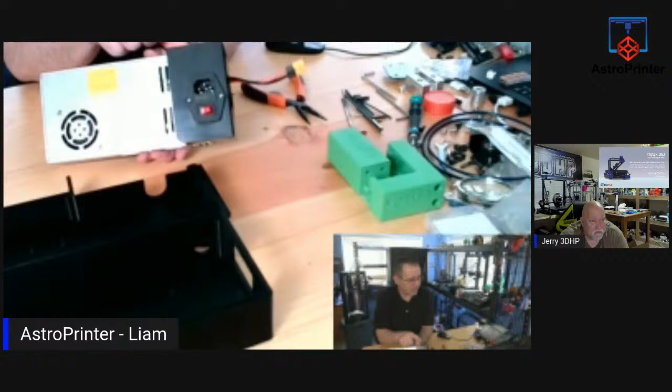Hi from Texas. So let's get the power supply done first. We have to take this power supply that came with it - let's switch over to the close-up view. We have to take this off because this unit has to get mounted in here, since this is going underneath the printer. So let's start out by taking this apart.

And we have some electrical connections now. Just make sure before you start this, take a photograph of the electrical connections, because if you get them plugged in the wrong spot, that's not going to be a good day. So slide this out gently, remove the connection to the power supply, to the printer, and we also need to use a screwdriver to remove these.

Thank you, Free Heathen. Yeah, it was a lot of fun.

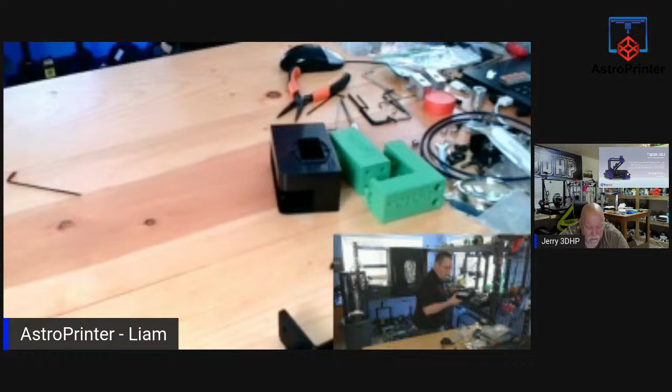So that's done, we'll get back to that in a moment. Now I want to bring up the base because I want to attach the drawer mounting unit, which is easy enough. It's only a couple of bolts, but let's...

Hutch's Makerspace said he might start streaming soon. Oh cool, so I'm gonna...

This is no longer needed, this piece here is no longer needed. But don't throw it away, everybody, keep it because you never know when you're going to build something, you'll need one. So always keep your parts, within reason, yes. Otherwise you end up with a junkyard at home.

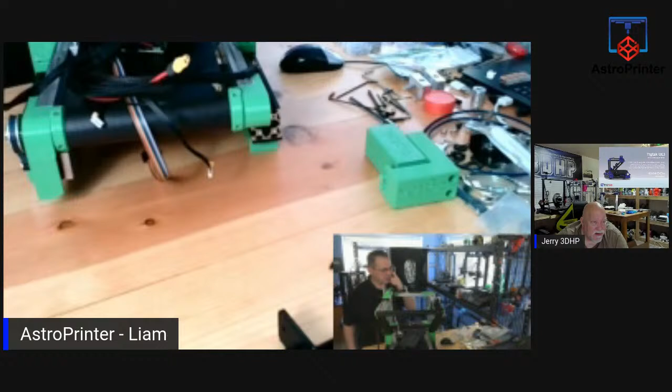So this is our printer as it stands today. You can see it better in the large view. What we're going to do is the tray unit actually mounts in here underneath the printer, and it also provides partial cover for this gear system, which is what drives our belt.

And then the other part comes on over here just to finish off this end.

Hello, Vincent 1977, how are you? Vincent, how are you? Good morning. Or good afternoon, sorry. So what we're going to do, I'm going to need some...

I think they're empty, let me verify the bolts. Good morning, Ben Brady. The parts that we needed modded, Ben, have been done by the company. They're 100% accurate now, thank you. They're about 99%, there's need a little tweak. Yeah, they work, I will feed that back to them today. But they're very, very close, so they will work. With a small mod on our side, it will work.

So the first thing I'm going to do is I'm going to mount this side. And the part that covers that will also hold the drawer, so I will need the drawer unit. Where did I put the drawer? Over here.

So this is the drawer mount, and it fits into the grooves underneath. So I'm going to tilt the printer up a little bit. So what will happen is this partly covers this idler here. It gets bolted in, and then this will slot in to these grooves, and it gets mounted in here like so.

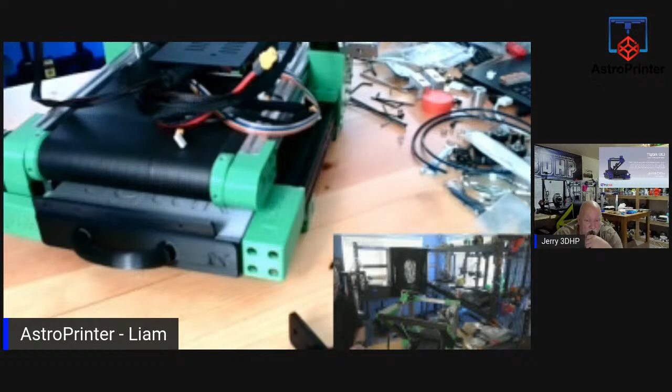TPU, print at 30 or 40 millimeters a second. Don't print fast with TPU. Print slow, and if you've got a PEI bed or any textured bed, do not print it on a textured surface because it will bond to it and you'll have a hell of a time getting it off. On a smooth surface, PEI works fine.

PEI will work okay, but you may find that to get the part off, you may have to spray it with water around the edges or IPA to get the part to slip. But water, some people say IPA, some say water. I find water is often better, but everyone has their own preference.

And the blade part that's going to be added on here, they're going to be posting the STL files tonight apparently, because I asked them about it the other day and got a response last night saying we'll do it tomorrow, and that's tonight our time. So for now I'm going to leave the drawer out of there because we do not need it in there.

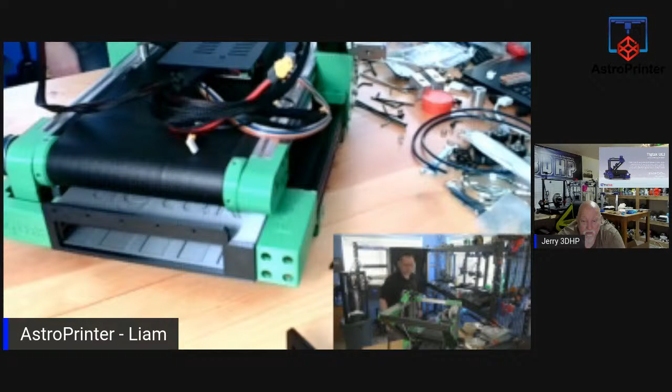And here I just dumped a whole pile of parts on the floor. Perfect, so we have that done, and the drawer is in there. The power supply is mounted in its box, which we can install if you wish underneath.

Ben's interested in a printer coming out of Italy, he says. There is a belt company. There is a company in Italy that does a belt printer.

Now, to mount the power supply box, there's T-nuts you have to use, and that's going to be awkward because the T-nut has to go between these. It would have been better if they'd used longer bolts and just bolted it straight on top of them there, but they haven't. They used a T-nut, so I have to take these out, put in the T-nuts, mount the power supply box, then wire up and put these back in again, which I won't be able to do because the power supply box will get in the way. So there is a design flaw there that we need to correct. I'll explain the design flaw in a moment. Let me come to the side here and I can show you.

I'm going to be off camera, off to the side.

So they have 2 holes in this for mounting, right? 2 holes here, turn it around so it's easier to see. These 2 holes, the problem is this is so wide, it's going to cover these, and you have to have a T-nut in between them. So I'll have to take these off, put in T-nuts, put them back on, and then do the alignment, because the power supply goes in like so.

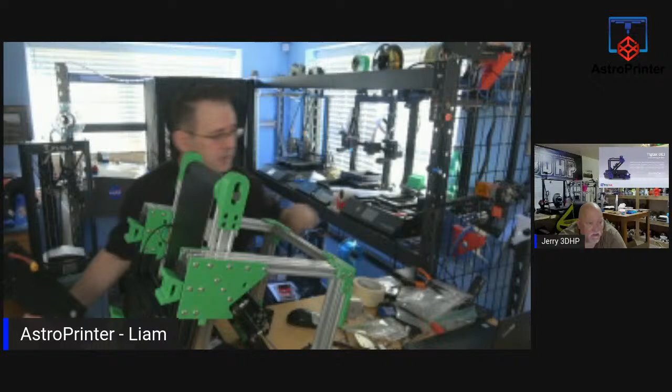Can you flip cameras while you're working up in there? Flip cameras to what view? You want the big view or the small view? The big view? I want the little one to go big, that way we can see what you're doing in there. You mean like that? Yeah, that's perfect, that way people can see what you're doing.

So this is going to mount on here, but because I need T-nuts for these 2 bolts right here, because this mounts in like so, and actually those holes don't even line up. This is too long, I'll have to move the holes in.

They moved stuff, but it didn't shorten this. So what I'm going to do, I won't be able to mount that now because of that, but what I will do is mark it.

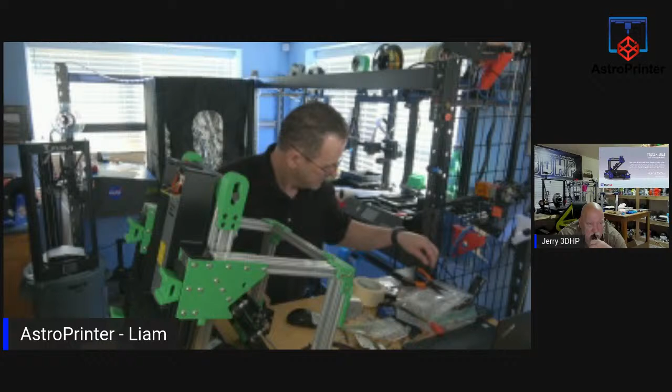Liam's trying to work that out. He thinks it's his printer. He's not sure why his video quality is not sharp. It should be. No, it's controlled by OBS on my computer, so it can't be controlled. No, Chris Travis, I'm not logged in as Liam's credentials, so I can't control his screen. Even then, you couldn't do it because it's all covered via virtual camera, and that's all on my local machine. No, what he meant was, I see what he's saying. Okay, I thought he meant just to mess with chat and pictures and stuff like that.

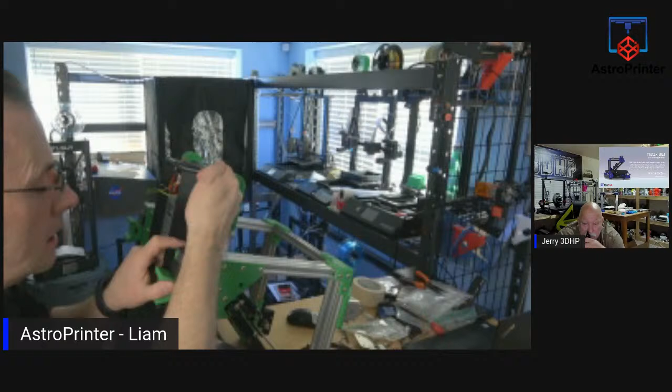So in the center, I'm going to mark with these where this should be, and I'm going to have to drill these out of mine, and then I'll feed back to them about this new position.

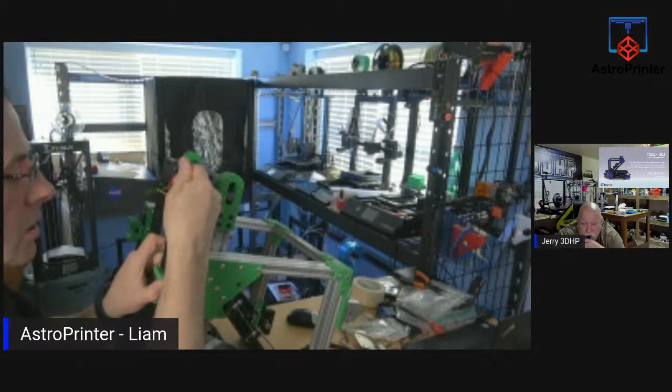Subsector says, on TPU, should I turn over the focus glass plate over? Yes, and not print on the textured side. Correct, and do so when you use some PVA glue on the surface.

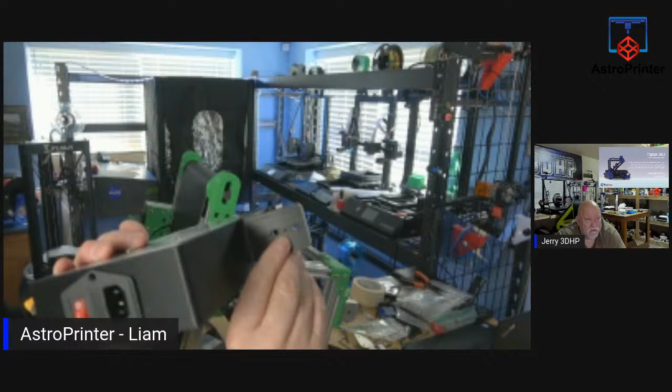So I've marked 2 spots here. They're offset by about 10 mil, so they'll have to move the design. Let me just measure how far it is. From center, it's about 9.5 millimeters, so they'll have to move them in 9.5 millimeters.

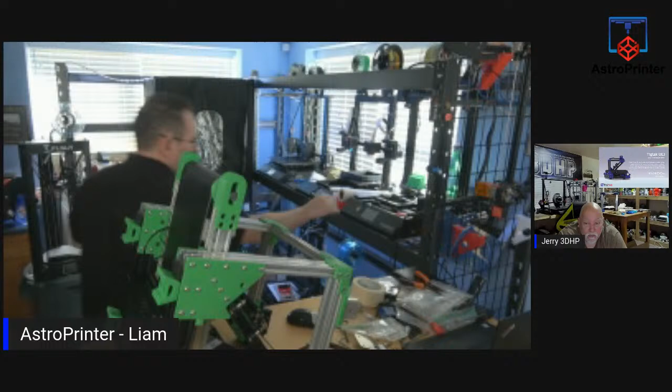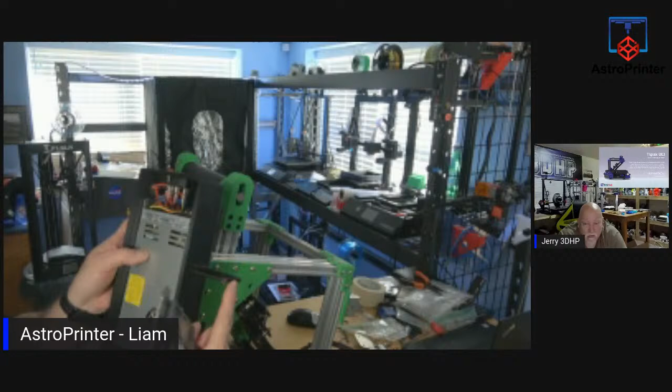And I'll give them that feedback. So they have to shorten this, because when that's mounted, it's sticking over the edge by probably 9.5 millimeters, and it shouldn't be. So let me see, it's sticking over by about 5.5, 6 millimeters. Yeah, so it's overhanging 6 millimeters. So this is 6 millimeters too long, and these bolts need to be moved.

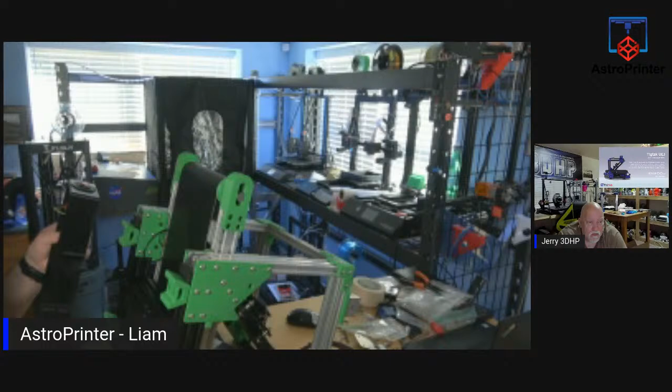These holes need to be moved about 10 millimeters, should be good, in 9.5, 10 millimeters. So I will feed them that back today, but I can drill this myself later on. So I can't do that right now.

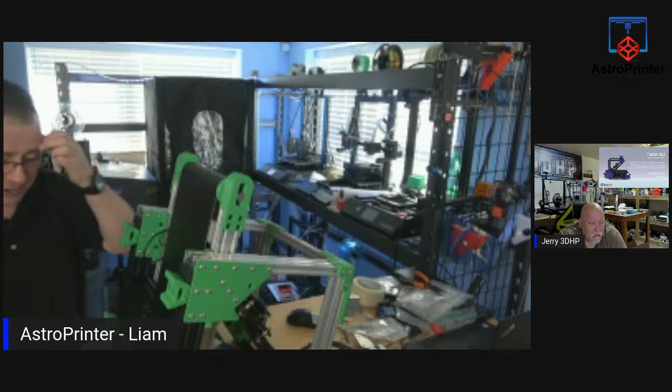But that's why we beta test, guys, right? So we can't do the power supply or anything else because I'm sure the other case is for the main board that I'll mount on here, and for all the cables for the main board. I'm pretty sure.

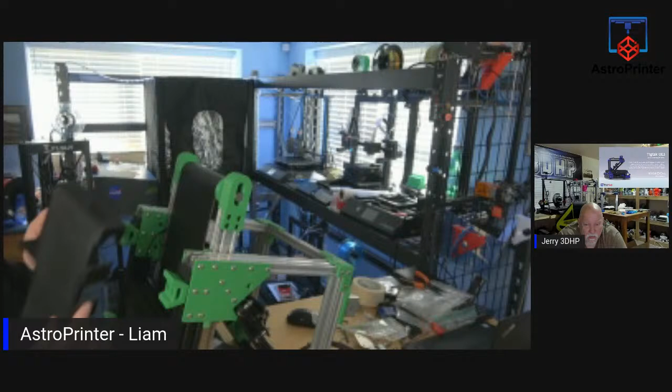Actually, that's the opposite. No, that's upwards. Actually, that is the right size. That one is actually correct. So this one here is correct because of the way it fits. Let me spin around here.

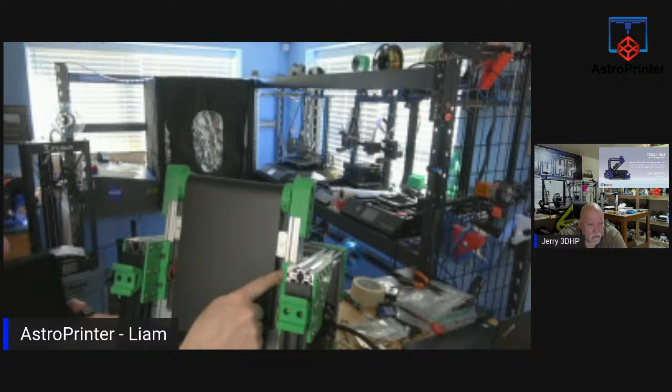This fits on here perfectly. I need to remove - oh, but another thing I found: these cap heads that are here are too tall; they get in the way, so they have to be replaced with countersunk M5 countersunks, I think M5x16s. I'll double check the measurement later. I'm gonna have to go buy them, but the place I buy them won't be open till tomorrow. These have to be replaced, both here and here, to hold on the belt with countersunk screws or mushroom head screws so they don't interfere with the case.

But if you line stuff up, this one is actually properly aligned.

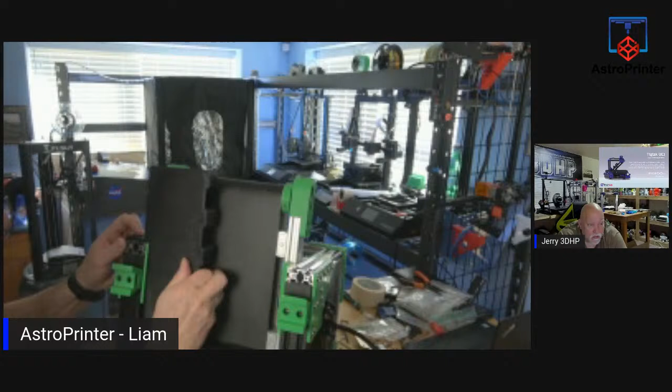The subsector - when I first started printing with TPU, I got on Facebook in a few groups. In the search bar I typed in printing with TPU, and I watched a few videos on YouTube, and got multiple opinions on different things, and then I kind of figured it out from there. It's how I usually do just about everything I do. Yeah, when you're unsure, reach out to the community - there's a lot of videos on it, a lot of people who've done videos on it over time.

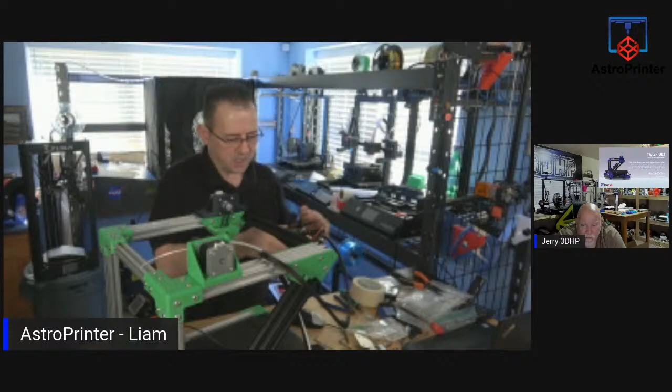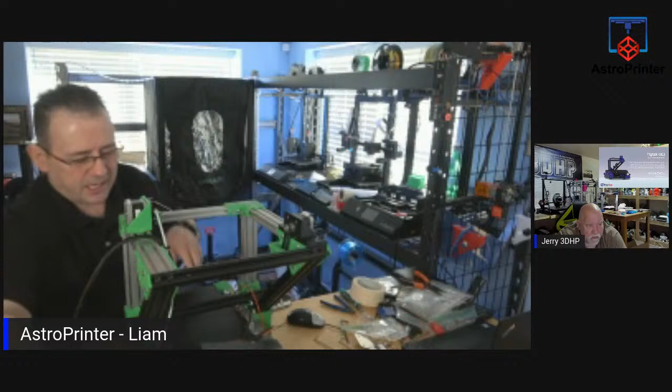Since we can't mount these because I need to be able to mount a power supply first to route cables, I am going to go off and start working on my x and y-axis instead. I'll get these wires out of the way because I have yet to.

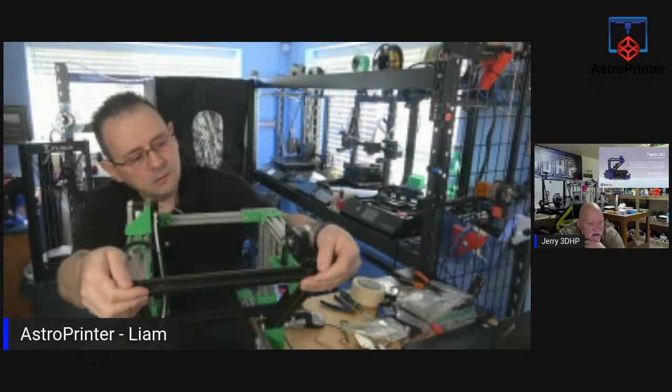On the front top rail where you have the black and chrome bracket aluminum extrusion, on the very front, how flush is that? Flush - when that comes out and meets it, does the black stick up slightly higher? No, they're flush. Okay. If they're not flush, you're not at 45 degrees.

Now, on a belt printer, or in this configuration, you come with a plate that is going to be the new mount, because the original mount that comes on the printer will not work. So you're going to mount this on here, and instead of mounting normal, you're going to mount it differently.

Let me see if that's a bad angle. Let me go to the close-up camera, Jerry - it'll be better, I think. Let me tilt that up, it'll be easier. There we go. So you're going to mount this upside down, okay, and underneath. Okay, cool.

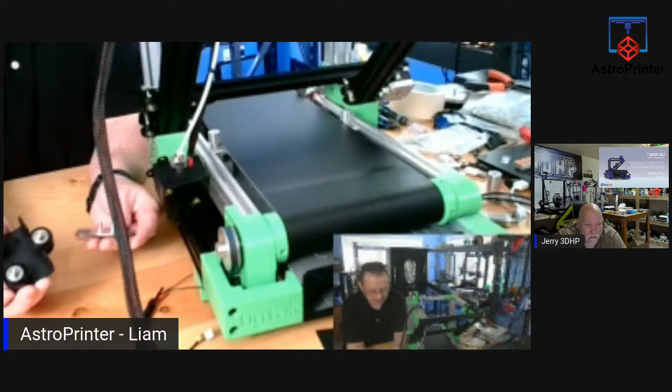That's how it gets mounted, because then your hot end sticks down under here and travels and prints on the bed. So we have to take apart the original one and take all of its wheels off and transfer them over to this. So the two upper ones go here, and the lower one, and the wheels go on the back here, in the back section of it.

So we'll need a wrench, and we'll need some Allen key sets. Should I have the right ones?

The last TPU I used for my tracks on the Droid build was Priline off of Amazon, a company called Priline. eSun TPU is really good too - I used eSun, and eSun always worked out well for me.

So these are Nylock nuts - Nylock nut, meaning it has a nylon inside of it, so once you screw it on, the bolt bites into it and locks it in place so it won't back out. So as I said, this is the plate. With this part facing down, we're going to be putting the nut in - this one, the bottom one, in this direction, with its offset wheel, and then we'll reattach the nut again on the outside.

Overture should print nice, hmm? Overture TPU should print nice. I haven't used Overture TPU, but as I said, I use eSun. I've also used NinjaTek. Yeah, Subsector ordered Overture - it's all she said she could get. That's fine.

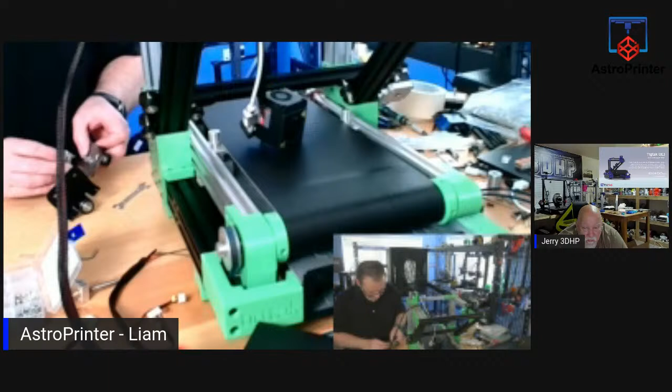Nadav said that they got two Ender 3 Pros for $219 each, and one's going to be a switch wire. Yeah, they recently announced that price, that deal. I saw that email go out from Micro Center yesterday. Well, one he said is going to be a switch wire. I don't know what a switch wire is.

A switch wire is a machine that uses belts rather than Z rods. Oh, okay.

So this one is important to make sure you do it correctly. Let me get it out of the way, because this is where you have your adjuster nut, your offset nut. Someone asked what the bed material is in those belt printers - it's nylon, but it looks like it's got a TigTak coating on it.

So when you're putting these lock nuts in, one side has a raised area, and if you look closely, you'll see it's not on center. That's how we adjust that wheel. So that must slide into the larger hole there, because otherwise it won't adjust.

The switch wire is a Voron printer using a sliding bed. It doesn't necessarily have to be a Voron printer though, there are other switch wires out there.

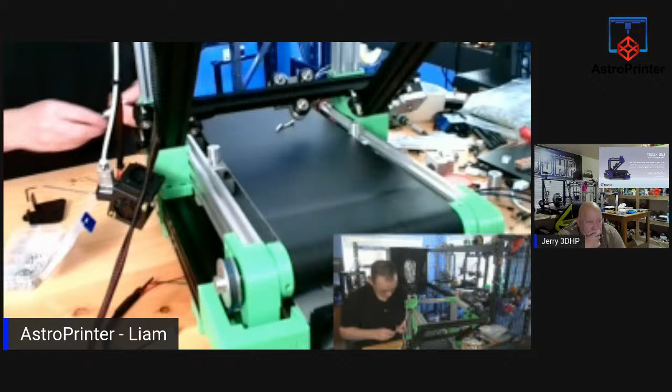That was well timed, I said spin around, and the hot end spun around on its own. The heat block did it, it's voodoo, I'm telling you it's voodoo. So the grub screw should be facing not towards the short side of it when it's printing. It should be facing downwards, right? That way, when it's mounted, you can actually gain access to it. So I'm going to do that over here.

I wonder if you ever got a tear in your belt. Obviously you don't want to replace it. What would be a temporary fix to be able to keep using it, tape off that spot and don't reprint there? I would avoid printing on that area, but if you got a bad tear you're better off replacing it, because you must remember the belt is held in place by even tension on both sides. If the tension is off on one side and the other, it's going to drift towards the side where there's no tear. That's going to ruin your alignment, so you'd have to replace it. You can avoid printing in the area to a point, but it's not the solution.

Oh, Chris Travis, take care Chris. He's probably already gone but I just seen his comment. Yeah, I said hi. All right, thanks Chris, I'm slow today guys, it's early morning. You must remember Jerry has volunteered to come on and help out cover the chat, but Jerry is 3 hours behind me, he's in Vegas. Well, it's almost 9 here now, but I got up at 6, went to bed like 12:30, I don't sleep well at night, so I set my alarm so I wouldn't miss it. Take care Matt, get some sleep. Yeah, getting sleep man, Matt's another guy that doesn't sleep. I think Matt is part vampire, part daywalker.

Now, I would do it without the fan cover. The reason why is, even though it looks nice, comparing it to the normal fan that comes on the hot end, this may interfere with airflow. If you compare how open this fan is in comparison, this might interfere with airflow. So we'd have to do some testing. I might leave it without the cover on it altogether because I'm worried about airflow through this.

I've had clogs that way. I've had my fans - I leave them open, cover or not, they pick up dust over time, and they're spinning but not quite as fast, and you get clogs because of it. Yes, you get heat creep because of it. Yeah, and that often happens, and you have to clean. That's why every time you go near your hot end, you have to clean everything out.

And the ones that come with the printer are often brushed, sleeve bearing, cheap hot fans. If you're ever going to replace them, go with dual bearing brushless fans. That way you have less of an issue with them, and they perform quieter as well.

I clean them with a Q-tip and alcohol. Yeah, and tweezers to pluck out any of the strings that actually get in there. Yeah, I do the same.

So we have that done. So let's get on and get our x-axis done. There's a belt tensioner here that I need to mount. This is the original belt tensioner that needs to be mounted over here.

I'm not going to tighten it in, I'm just going to snug it so it doesn't flop all over the place. Let's see, slide this up so we can get access. That straw - can you drill holes in the side so it clamps? It's too thin.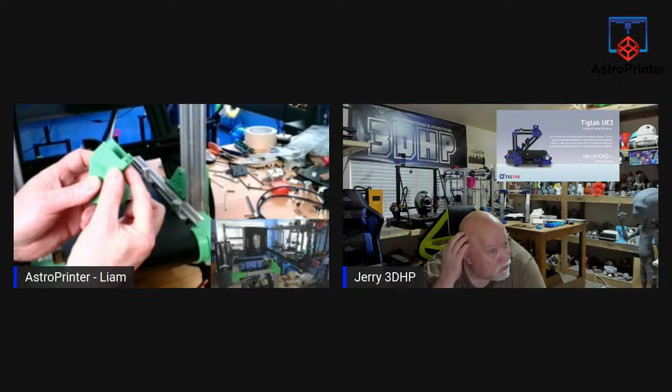You know what? A bit of double-sided tape on the inside would actually do the work, because it's on the cool top part of the heat break anyway. So if I put something like padding in there of some form, and you slide it on, it would kind of wedge itself into place and stop it from wobbling, and that would probably stop it from knocking itself free. Wedgies are always good, that should help.

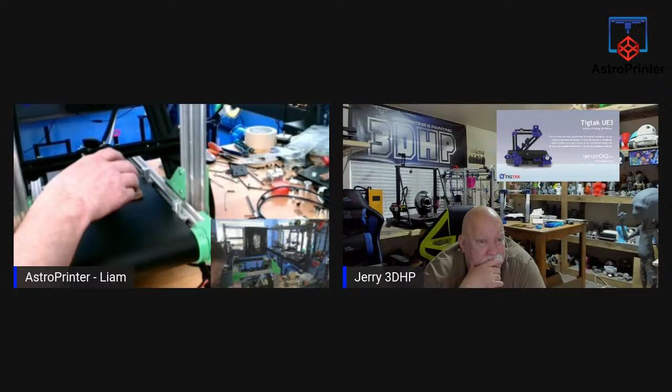Yes, Jerry. From experience, no, they're not great.

So the fan and - actually, I see another issue. If that mounts on here, Jerry, there's no part cooling fan.

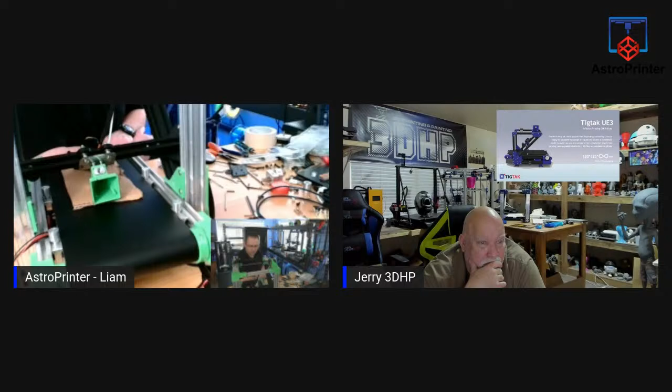Look at the design, there's no part cooling fan in it. Yeah, there isn't, which is a design flaw. So they have no part cooling fan on this, which means you always have to be very careful about what you're printing. If you're doing really small parts, the parts won't cool. I have to go back to them on that today, that they actually totally missed the part cooling fan because look at the design there.

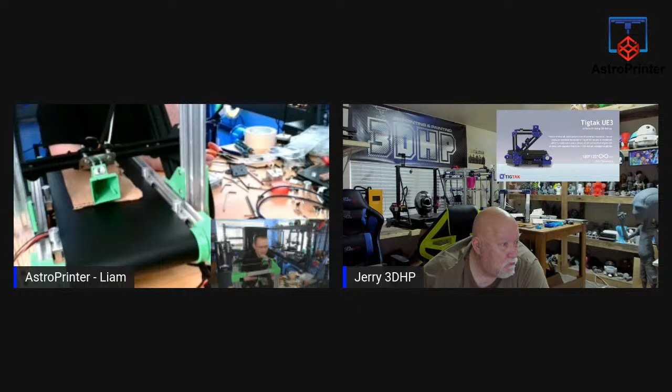I don't think there is, Jerry. Am I right? I'm looking at the side view, it doesn't even show that part. I'd have to run the video. Share it again so we can all see. Let me run the video, just mute the audio. Actually, let me bring that full screen.

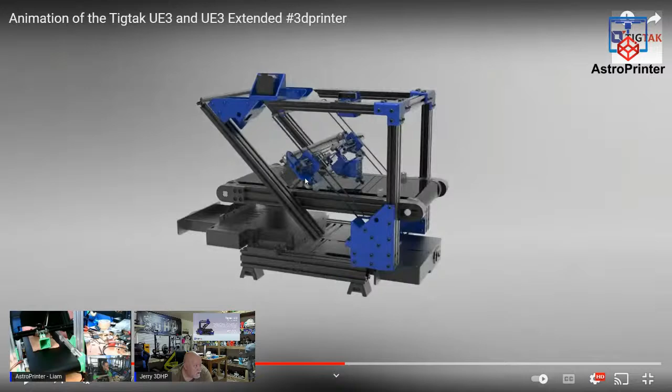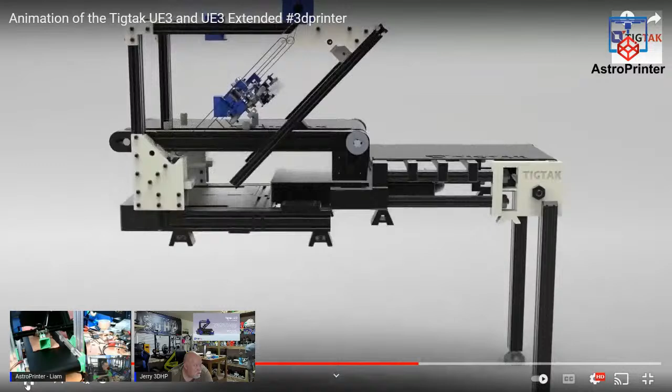Yeah, there's no part cooling fan. If you look at the hot end, it's totally missing a part cooling fan. Yep, there's none, right here. I didn't even think about that until you mentioned it. I just looked at it now and was wondering where's the part cooling, and I remembered I never printed a part for that. Even in that picture right there, it just shows nothing. So, okay, take that out. Yeah, there is none. So we found a design flaw. We've done a couple of design flaws, and this one is for one, there is no part cooling fan.

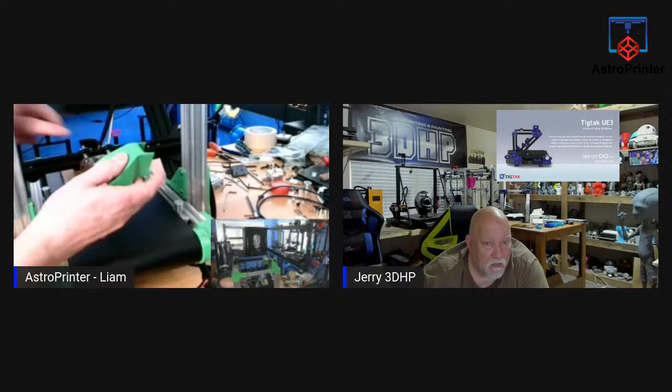Now the other thing that worries me a little bit is, even though this is PETG, this part down here rests right up against here, right above the hot end. It's so close to the hot end, I'm worried that latent heat rising would actually cause issues. And I printed that part out of PLA, I didn't mind, but this is PETG, still...

If you try and print PETG on this, you're going to run into problems. It might limit you to only PLA and not TPU, but PVB and materials like that. So I have to go back to him about that because they have no part cooling on this.

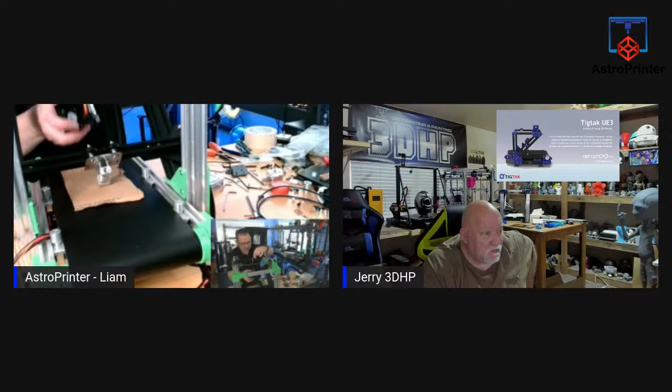We can get it wired up anyway, right? We can get the rest of it, we can get the belt on. I'll be right back. Okay Jerry, so I'm going to reuse the original printer belt that came with the printer. I have the original belt here. I should be over on this side, let me just put that over there. I'm going to use the original belt that came with the printer.

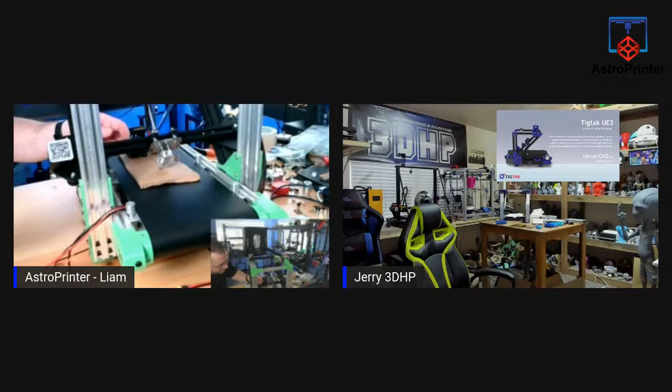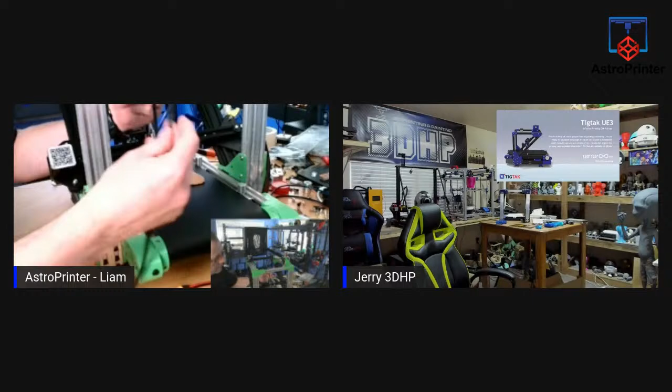And it mounts, I'm going to be off to the side here, so please excuse me. The belt will mount as normal, whereas you put the belt in and turn it so the brass grommets are pointing outwards. Make sure the teeth on the belt, right, one side is smooth, one side is teeth. The teeth are actually pointing in towards the extrusion because you want the teeth to go around the idler, because the idler needs to grip it.

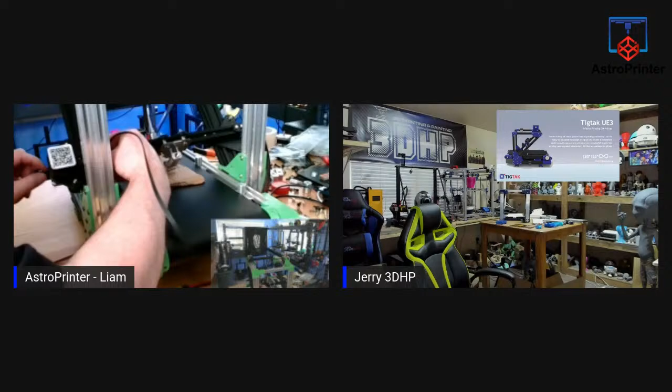It needs to go around the idler so it pulls, and then back out the other side and around our belt tensioner. Where's it going? So this is interesting that we're finding design mistakes, but that's why we're beta testing, right?

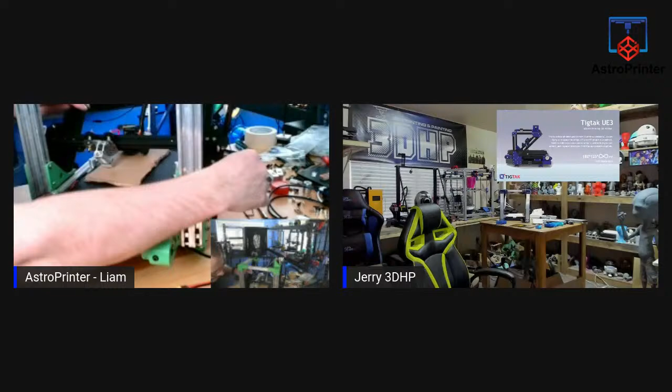That goes onto the idler. There we go. Goes around our belt tensioner, which is on this side here. The cable's in the way. There's our belt tensioner. And loops back underneath again, over to our hot end bracket, and again, teeth pointing downwards. We feed it in.

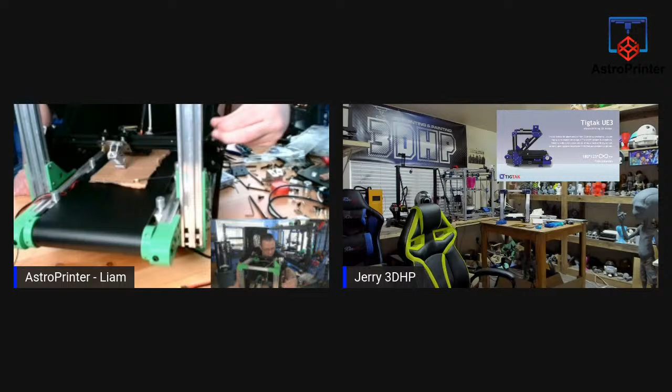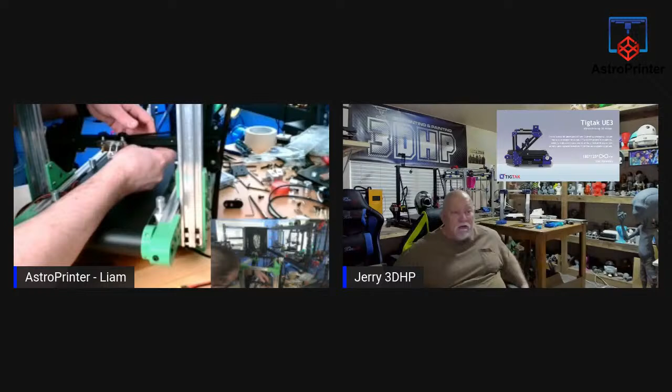Actually, I might take that off altogether because I need a small bit more leeway with that. I can put that on after the fact, need a small bit more clearance to get these attached. And it slides into the groove and turns. Now our belt is in place. Now we're going to put on our... where did I put that? Our tensioner. Loosen these up a bit.

We slide this into place and put our belt around it.

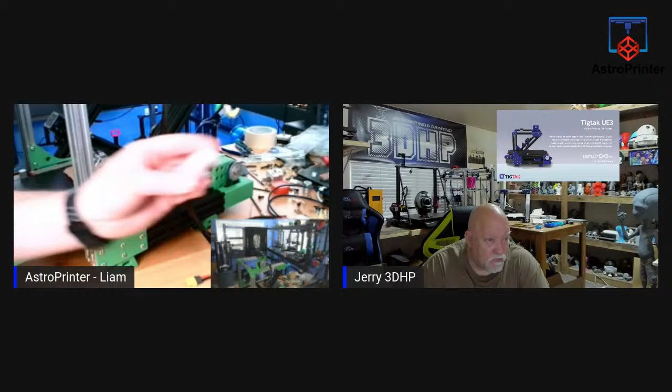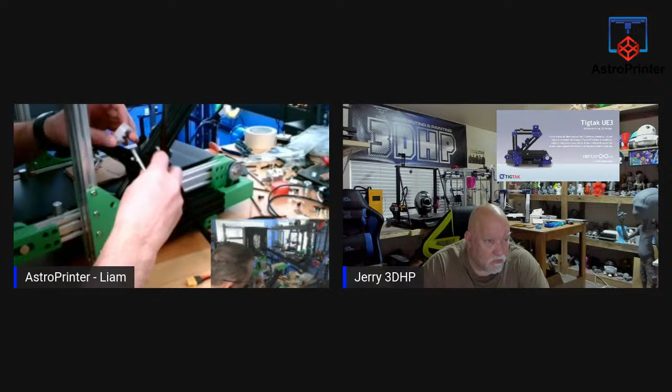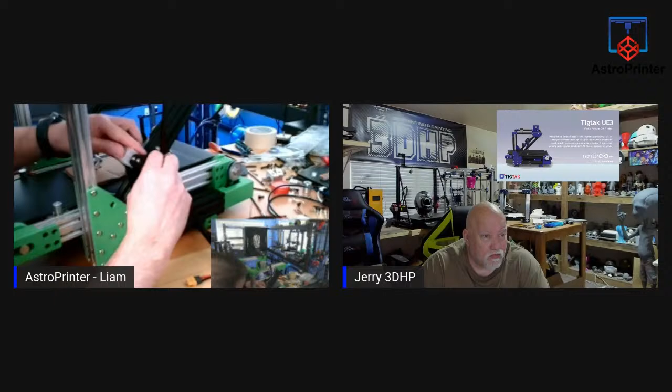If you've never done these belt tensions, you can get a little part you can 3D print. I use this all the time, and it keeps the belt tensioner straight. You slide it over your extrusion with the belt in the right place, so it goes through the inside the V groove, like this. Put it on there, get the belt somewhat tightened into place. Let's make sure that's in right. Okay, and then push. It allows you to keep this straight.

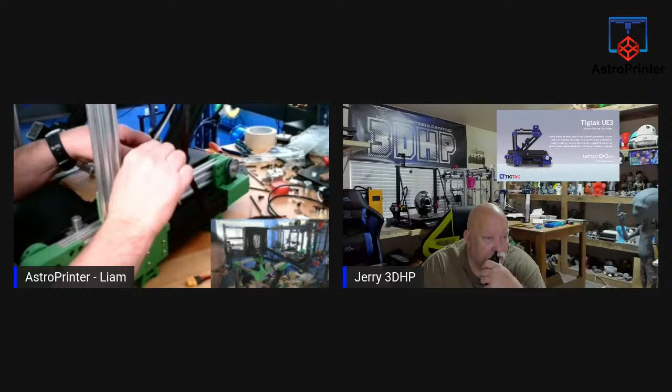You're pushing on it while you tighten this down. Simple little device. Just put your thumb into it, turn it, and you get good belt tension. It's an easy way of doing it. Let's turn properly so it doesn't slip out.

Now we have a nicely tensioned belt. It's easy because you just put your thumb on this. One area of it is angled, one area is straight, so the flat end goes up against the belt tensioner, and then the other one you put your thumb behind it. It fits your thumb perfectly. Just hold on to the extrusion and push with one thumb hard, and that'll get you the right tension.

You can tell when you bring the belt all over to one side, you should be able to move it - get your finger in there. You should just about get a finger inside of it, right? That should be roughly the right tension. You can always tighten up later on if you find it's an issue.

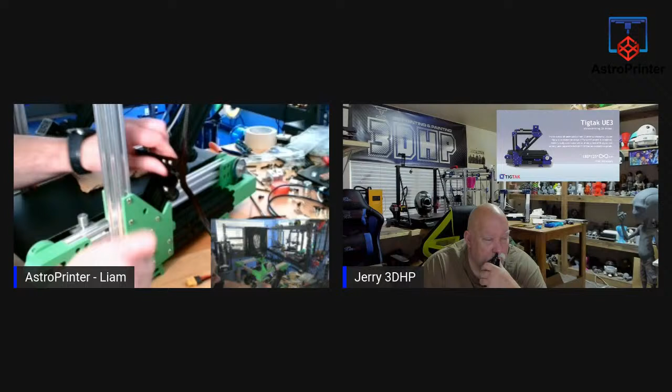There are also PETG 3D printable belt tensioners out there. I know Prusa printers you can get them, and by putting it on and pushing down, you can tell if your belt is the right tension or not.

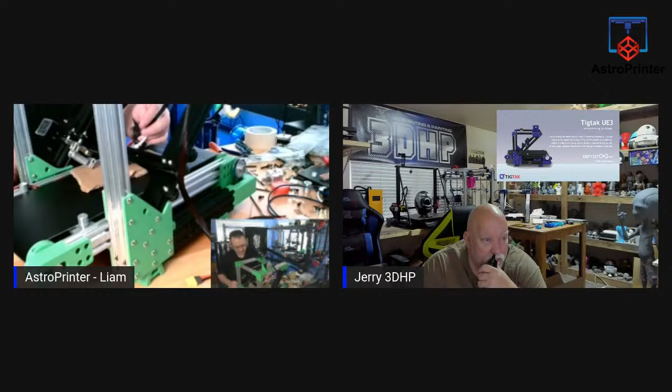So I'm not going to take this apart. The reason why is we don't have the parts for it. There's nowhere to put part cooling fans.

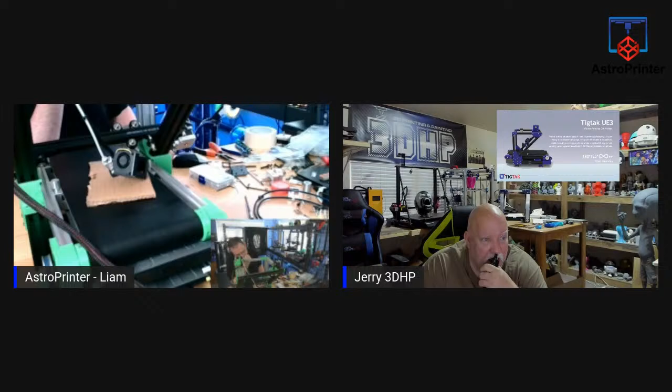So next, what are we going to do next? We have that done. Can you see any way that you can incorporate that existing shroud? Since we reuse so many parts from the Ender, is it designed so it can be reused somehow? Well, actually, one on the back.

If you take off the part that they printed that goes on there, well, I guess it would hang down too far, probably. I'm not sure. There's only one bolt hole that could possibly line up. Actually, it doesn't - no, you'd have to re-drill the whole system, the whole place to make it fit. All right, there's no easy way to do it.

Hook up air assist to it from a laser. I could move my air assist from a laser over there. I agree. Yeah, I have to watch the first two layers and then turn on the pump. Or get a desk fan, turn on high.

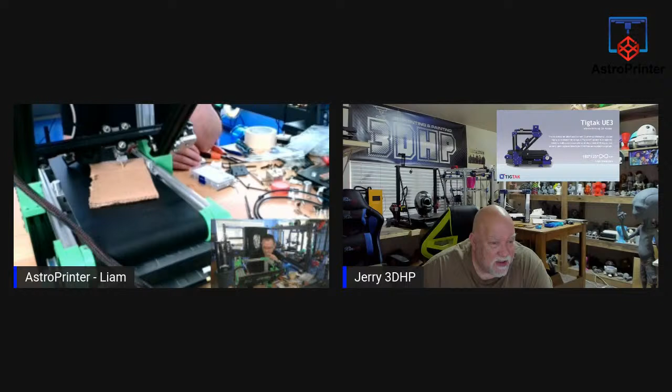Now they have not indicated how to mount the Z end stop at all. Can you bring up the video? Let me verify, bring up the video again. Yep, we're building everything off this video, guys. That's all we have as a build. And because we're beta testing, they want us to try to figure a lot of it out that they haven't figured out.

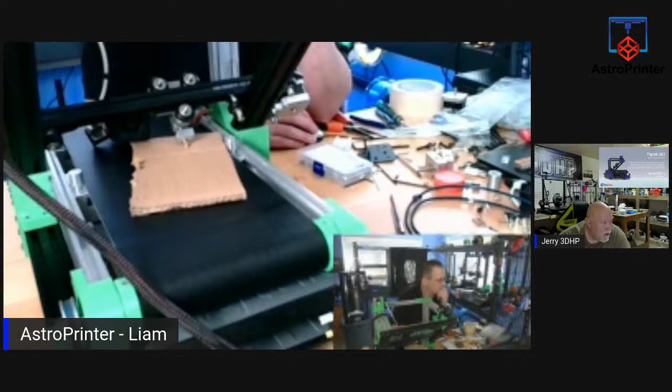Well, I don't know how much they've tested this. So, go back to the assembled section. Back before it explodes, Jerry. Not that - that's not what I want. Where is it gone? There. Tell me when to stop. Go, I want to go back and let it spin the other way around.

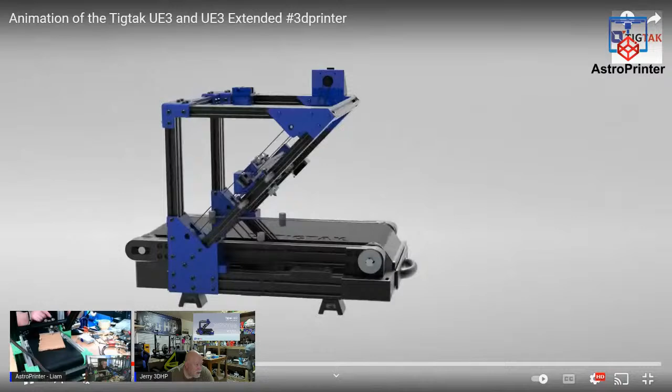So it is underneath, so I don't see. Here's my issue - our Y travel is limited, which I expect. So we'll have to mount the Y end stop in here. They don't show a Y end stop in there at all. Let me spin this around so people can see inside. Our Y end stop will have to be mounted in one of these extrusions. Let me see, is this better? This might be better. We have to mount a Y end stop in here so it gets triggered before.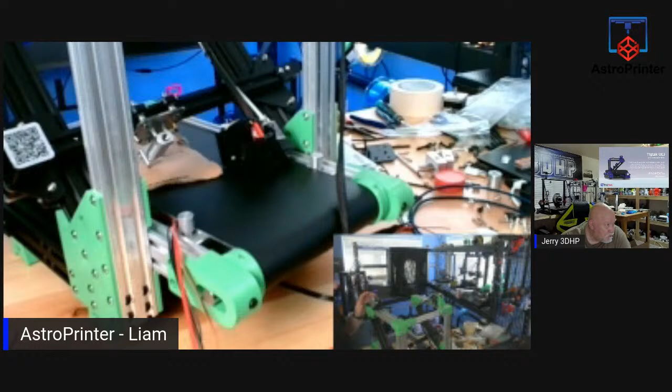There's no electronics in this at all - it's just all hardware. I haven't done any of the other cabling. These wires are for a hotbed and thermistor. I know I'll have to extend some. I'll have to extend for this - this is the Y-axis on the printer, the normal Y-axis, and this will have to be extended up. The Z-axis has no end stop, so you have to turn that off in firmware. And the X-axis I'll have to mount, but I'll have to mount a Y home position here, using its end stop.

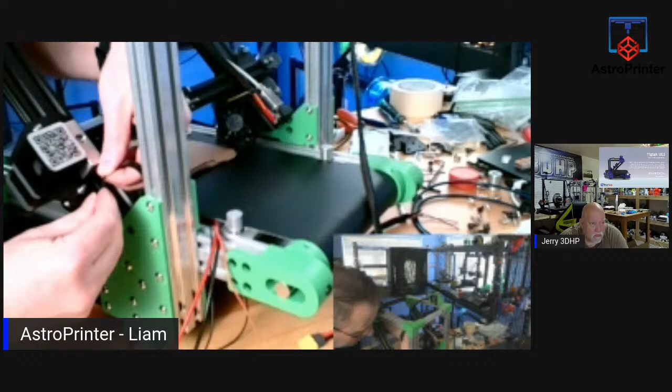So the belt is looped back on itself, and then you wrap it with a zip tie up really close. You're gonna make a lasso, but you're not gonna hook it or fold it on itself, tie it, and hook it in there and pull it down tight. No, you loop it around and the zip tie holds it in place. That's how you do it.

So this is kind of hard, because on all 3D printers, I just double the belt back on themselves and take that ball that's on the end and hook it in. Like when you buy a 3D printer, it has a brass piece crimped on the end. But these don't have the brass crimps, that's why I fold the belt back on itself. But when I put on the zip tie, it makes the same thing, but it's plastic.

Hello, Sith Lord Britt.

Hey Britt, so you put that in there, so that's anchored, that's not going to move. So the zip tie is actually holding it. I can get this closer if it's going to help. But one second, guys.

So I've actually doubled the belt back on itself. This is set to fixed focus, so that's why it's out a little bit. And then I zip tied it, so the teeth are against each other, so it's not going to move.

You remount this. Now I'm going to run the belt that I pulled through a while ago, which is very, very long, but I don't want to cut it, so I need to make sure I keep it correctly aligned, and it looks like it's going to be going up. Ooh, one second.

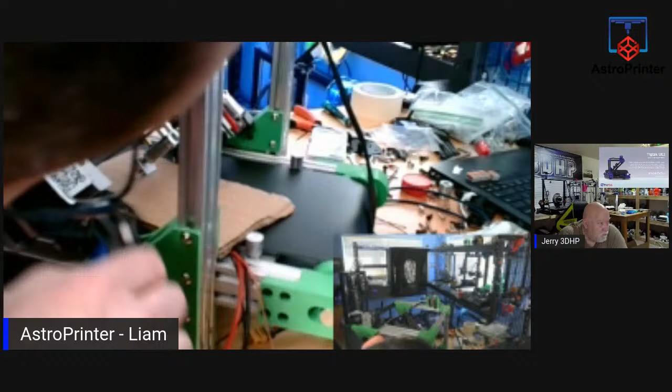Again guys, we're building this without any guidance whatsoever. They give us no instructions. We have one breakout video, which is an explosion view of the build, and that's it. So I'm going to cut off this belt and flip it the other way around. Instead, I'm going to go under here and over the top, which would probably make more sense.

So I'm going to reattach this but the other way around. I'm going to come up underneath it. Oh, there goes my main board. I'm going to come up from underneath into that groove instead. Zip tie that again, I just flipped it the other way around. And then this time I'm going to go under and over, so the belt will actually run up the front, which should be fine. Oh, it came off. I did that.

So we're learning as we go, guys. This is the whole point of this is if you ever want to get into designing and building your own printer, which a lot of people do.

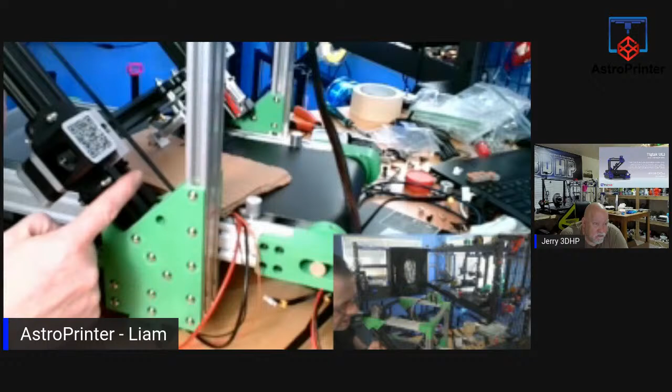Look, so the belt goes zoop here, the teeth pointing upwards. It goes underneath the axes, underneath the idler, up with the teeth facing down, passes over all of this, then comes around the top of the idler down here, and then we zip tie it down here again.

I didn't realize there was an idler down in there. I'll have to watch your other video. There's an idler on the bottom and on top. Yeah, so the top ones, there's two top ones on each side here. Actually, there's three top ones. One on the outside, there's one here, which is for the belt. There's one here, which links the Y-axis motor to this. And then there's one over here, which holds the bar in place, which keeps these two in tandem. Okay, I'll be working on that today or tomorrow.

So I'm going to cut this with a bit of length, and I'm going to leave it because I've got plenty on the other side.

Comic Age Clothing says it looks like it's bit rate by the look at it for the video problem. Bit rate, maybe. When I first started streaming, stream to YouTube only, I never had these issues. When I first started streaming, I kicked my tier up with Cox cable really high, so I could. I'm getting 1,000 down, 35 up right now, and it was a lot lower. It's like 5 up, I can't get that in my area.

Yeah, actually I need to loosen this to get the belt in. I can't reach it, so just let me. Just to get the belt fed up inside this. And I'll bolt it back into place.

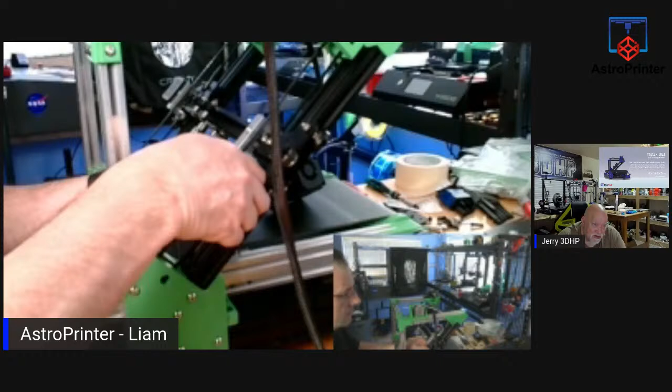Move it about halfway up to get it. Yeah, if they don't have any kind of a tensioner, there's no way you're going to pull that tight enough. I doubt I can put it tight by hand. Because I left enough leverage on enough parts of it, enough pieces on the end length to allow me to get a grip of it to pull it tight. And then your left and right side would need the same tension on it. Yeah, that's what I'm checking, that's what I'm going to be checking now before I do it. That's like here.

I get them right, I pinch them together, and then lock it in. Yeah, they're roughly the same.

So we have to cut off all this excess, but I'm going to leave it there for a moment. But we have our setup. We're getting there, guys.

We get rid of some of this trash that I don't need anymore. My trash bucket is the corner.

Right, so we have the X-axis done and the Y-axis is ready. And as we run off the stepper motor, I haven't done the electronics mounting underneath yet because I do need to modify the power supply mount, as I showed earlier on, because these holes on the power supply mount are not properly lined up.

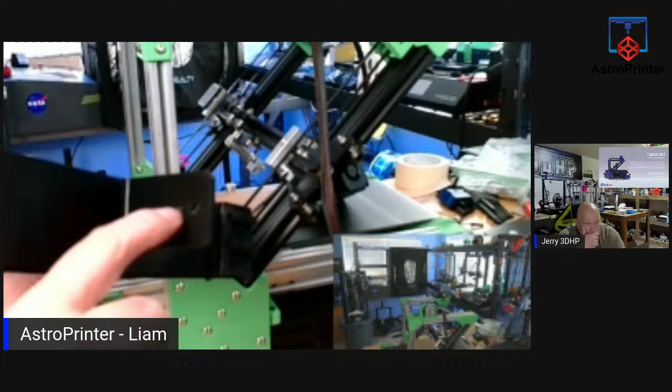They need to be shifted about 10 millimeters to the side. So I have marked 2 holes, and I will have to drill them out later on, and then mount it inside. But the new modified power supply box does work, and this will then mate up underneath in the printer. I'll get the other piece that I want to show you. This is mounted.

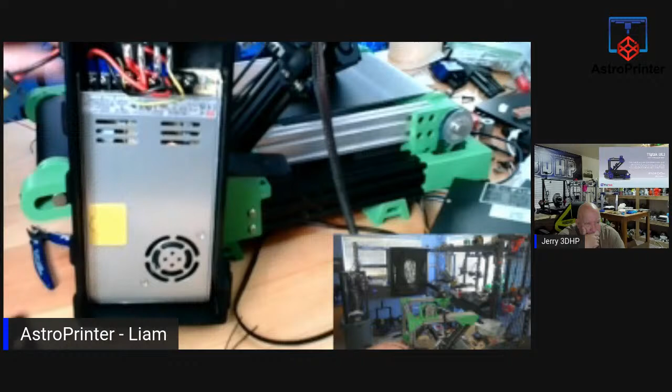I'll tilt this camera down so it's easier for you to see. This is mounted upside down like this, so this would be facing downward. And then on the other side, we will have this part, which will be facing upwards, like so.

And this will be mounted into that behind. And then the cables will come across in, and our main board will be mounted in here at the back. So we'll have our SD card and our USB ports here. So that's how it's going to be wired. And then any cables I need will have to be routed, like this will come over and power the main board through this connection, through this cable.

And then the one thing I wish, maybe I might change this cable and make it longer, because I don't like the fact that it is kind of short, and it may get in the way because it'll be sitting over the main board in here when the power comes through.

But I will be mounting the main board in here later on. Let me go back to full screen, it'll be easier to show you. So it'll be mounted, they'll be mounted together like so, underneath.

This cools and blows downwards, which is perfect. And then the main board will be mounted in this one here. But I do have to drill this one out. And let's see what else, I do have a cover for this.

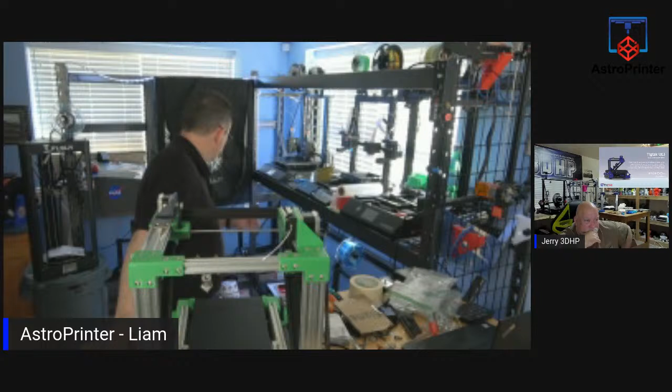Yeah, I won't be able to do the full height. You could print a lot of Legos. Cheaper to buy Legos, but I can do a lot of the other smaller prints. But do you have any trains there? You know, I've never ever in my life built anything out of Legos. Never? No, when I was a kid I had Tinker Toys and Lincoln Logs, I never got into Legos. Oh, I had Legos, I must have been spoiled because I had some. My grandkids have a lot of Legos, so I should probably hit them up and say, hey, which set don't you like, will your daddy sell it to me? You should get a set because a lot of makers do Lego builds online as well.

I could have a Lego day. If I didn't already have the Saturn V done, I would have done it live here, but I did it a long time ago, about 3 years ago. I'd have to find the instruction manual now, I don't have it anymore. I don't think Lego lets you download it. To me it's about the model, not about keeping the manual around for something I'm not going to rebuild. I was actually considering gluing it together, putting resin on it, painting it, and reattaching everything to stick it together.

I want it to be permanent because I use it for display when I do NASA outreach stuff. I'm going to be at the Henry Ford Museum for three weekends next month with a Saturn V, and my buddy's bringing his too. We're going to show it assembled and broken out at different phases, explaining how the rocket launches, plus talking about the technologies that came out of the Apollo space program and space in general. We're adding in some other stuff too, though Tang didn't actually come out of the space program.

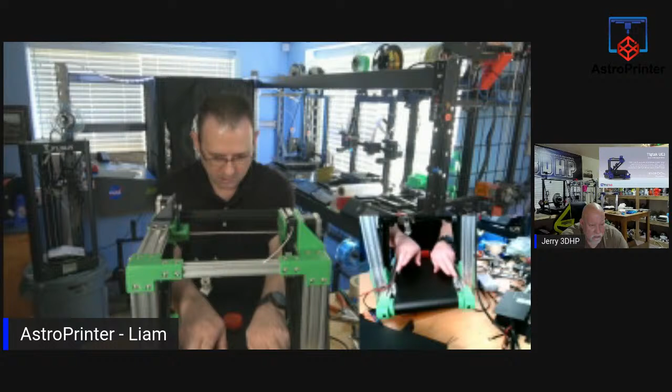I'm manually turning it, and we have our bed levels. These bolts here are for bed leveling, so you'd level down here. Actually, that's weird. I think they got this wrong, something's wrong here. I haven't got that far yet, so I don't have an opinion.

Here's why I think something's wrong. The heat plate is back here, and it only heats where the nozzle is touching, so that heating area goes right up to here. As soon as a part leaves this area after being printed, it cools off. Logic would tell me you'd want to heat back here where the heat plate starts, in advance of printing, so it's preheated before it reaches the nozzle.

I understand that, but I think it's... well, that's what you just said basically, you want to heat from the nozzle back towards where it's feeding from. That way it's preheated. Then after it passes the nozzle and prints, it cools. There's only about 2 centimeters from where the nozzle is to where the heat plate ends.

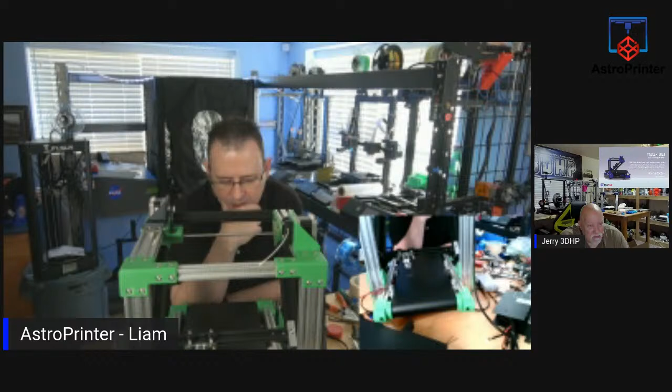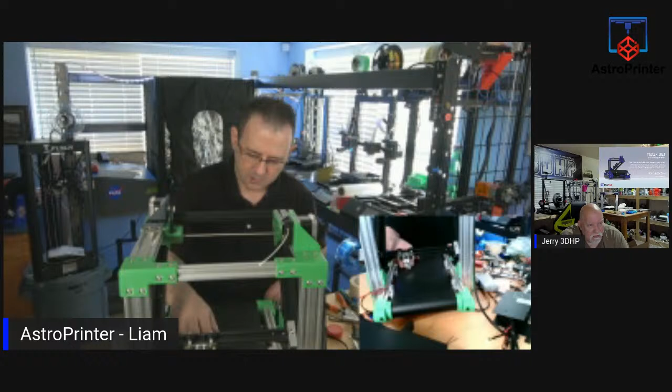I'm thinking the nozzle should be in the center of the heat plate, or at least 2/3 of the way in, so the nozzle would be further back. You wouldn't want it to start releasing heat while still printing a long part that quickly. My worry is that if it's too far off, it'll cool too fast immediately after you print.

So let me show you, turn to the side so everyone can see. Look in the close-up camera, this is probably the best view. Let me make the close-up camera full screen.

Right, so the way the heat plate is positioned here - the heat plate ends roughly where my finger is, and the nozzle is only about 1 or 2 centimeters ahead and behind it. So you're heating all this area.

I understand, but with the alignment of this, you're heating this area. But as soon as you've finished printing and it moves 2 centimeters forward, it should be behind the nozzle. I know this positioning is okay, but I think the heat bed, in my opinion, if it was slightly further forward, you'd have more area out here still being kept warm.

So you maintain bed adhesion until the part is moved away. But at least then you have maybe 3 or 4 inches, maybe at least 3 inches or more on a hot bed before it goes out to be cooled. Because if not, I'm a little bit concerned about the heating after the part, because it'll cool.